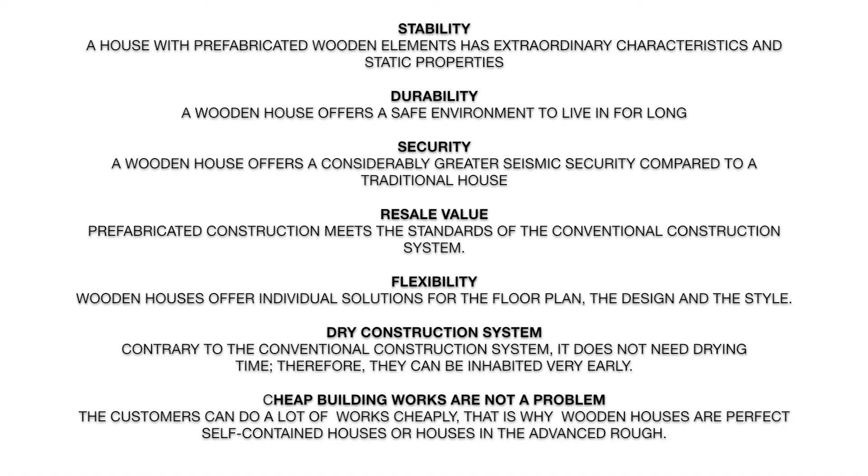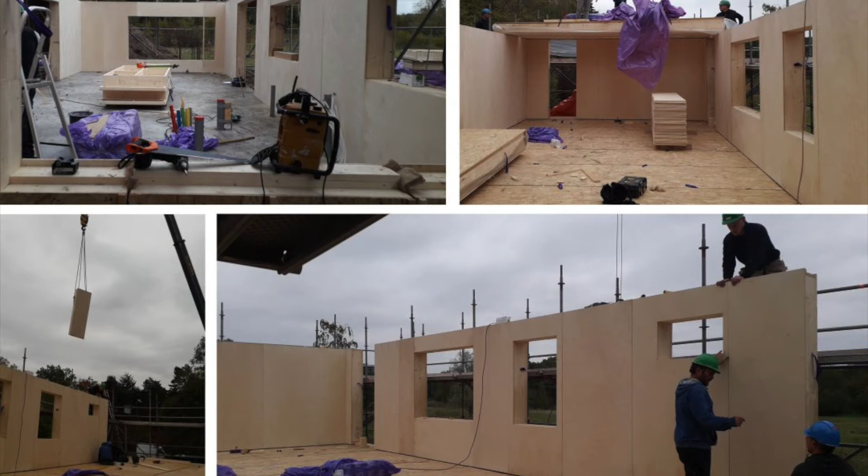In addition, we can say that prefabricated houses with a wooden frame construction system are built in record time, months ahead of a massive masonry house. A wooden house has excellent insulation values and a good reduction in CO2 emissions compared to the production of bricks, cement and steel. It has been verified that with the energy necessary for 1 square meter of brick wall, you can realize up to 8 square meters of wooden wall.

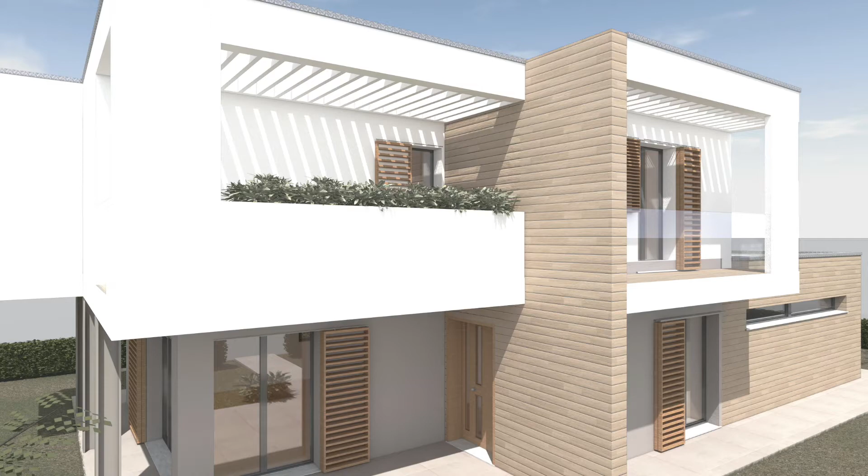The project was carried out by the architect Alessandro Vanoni, architectural designer expert in building with high energy efficiency. Vanoni's central idea about this work is to promote sustainable development construction with energy efficiency, high indoor comfort and respect for the environment as main objectives.

Vanoni's buildings are characterized by high energy performance that result in saving on heating and cooling costs, as well as a significant reduction in pollution emissions. The importance of the project stands in achieving an excellent architectural quality and high energy and technological performance. Vanoni's work is based on the concept of integrated design.

A building is comparable to the human body, where the structures correspond to the skeleton, the installations to the circulatory system, and the design to the skin. This metaphor explains how fundamental the connection between structural, plant, and architectural design is. They must work together and proceed together in order to give life to a harmonious organism.

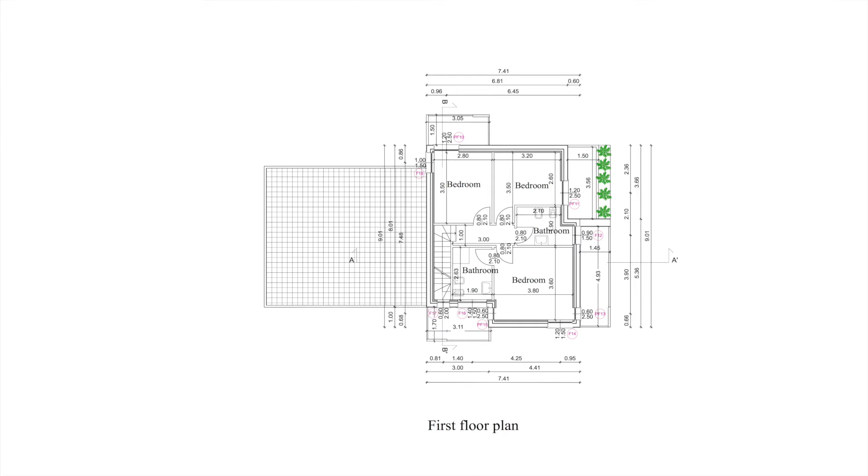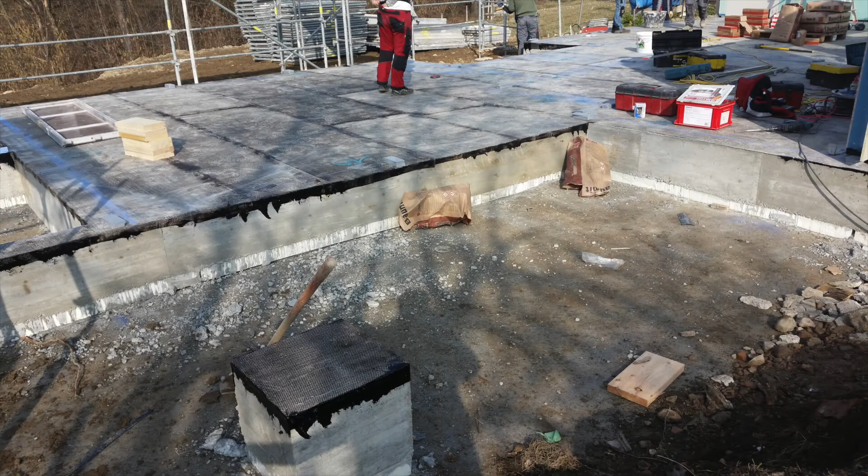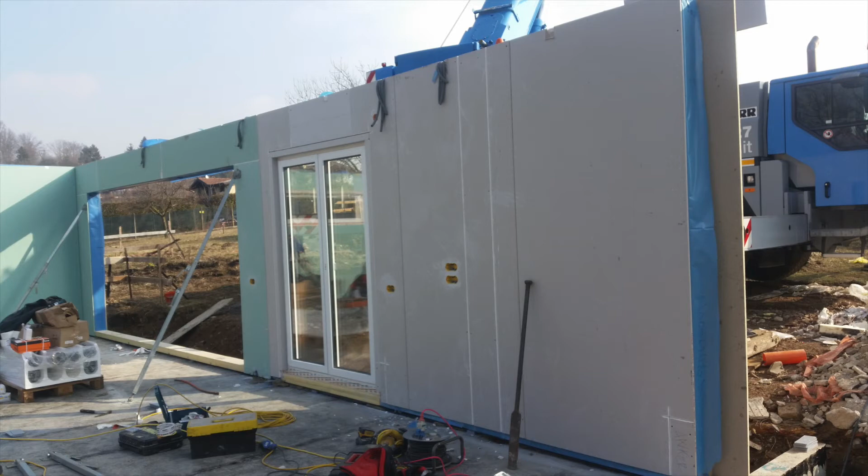Within walking distance from Varese, this residential project involves the construction of 4 single-family 2-story villas with low energy consumption. One of them is already finished. The high efficiency of walls is guaranteed by the use of eco-line panels. The efficiency level of the casing is maintained constant by the installation of PVC doors and windows with triple low emissive glass to ensure maximum performance and better durability over time.

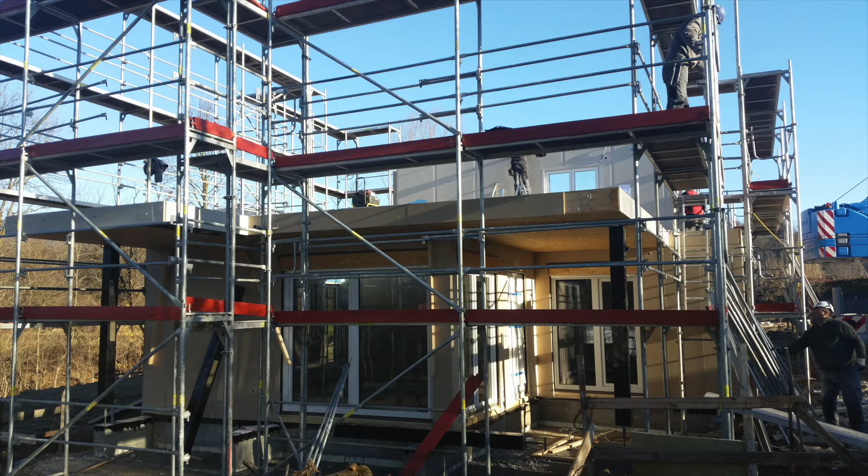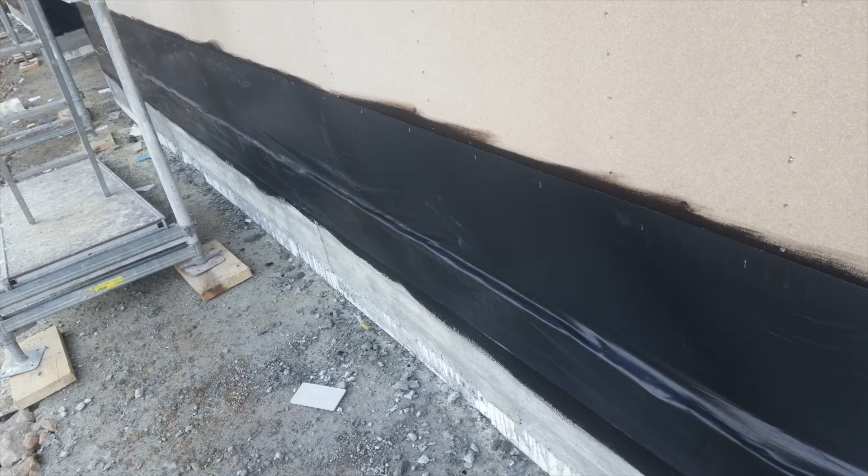The performance check on the completed building was done with a blower door test, which allows to measure the airtightness of a building after imposing a certain difference in pressure between inside and outside, identify the air leaks of the building envelope, and the presence of any discontinuities on the air seal layer. The results have highlighted the high performance achieved thanks to the prefabrication system in wood frame used.

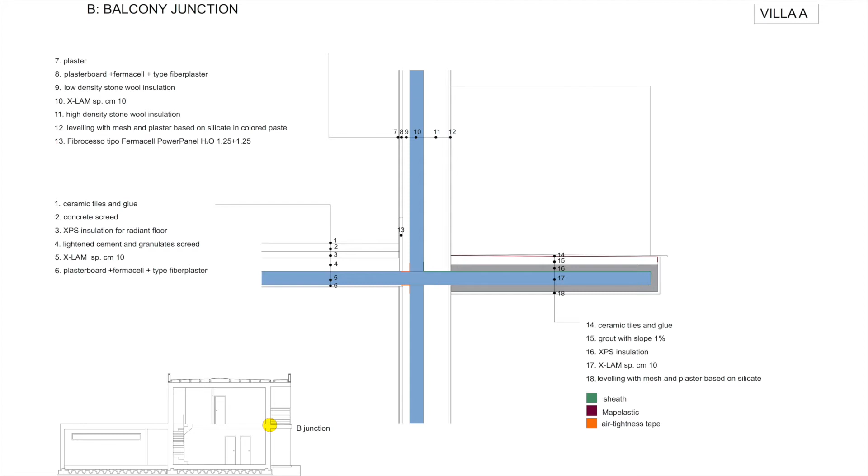In the construction of the building, Vanoni used for the insulation XPS panels, for the infill wall XLAM panels. Lightweight, easy to process, XPS is finding a very heterogeneous application in the building industry to insulate buildings. It is used in humid environments or in contact with the ground, in situations of high compressive stress, in the realization of insulating sandwich panels, the so-called overcoat insulation.

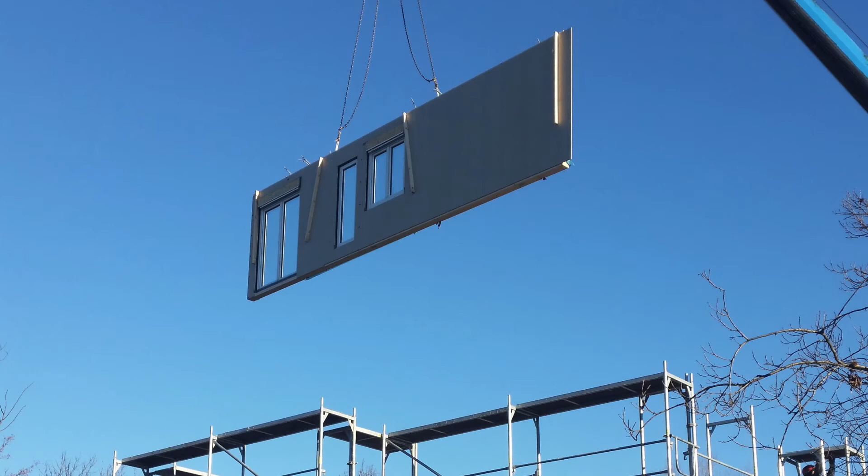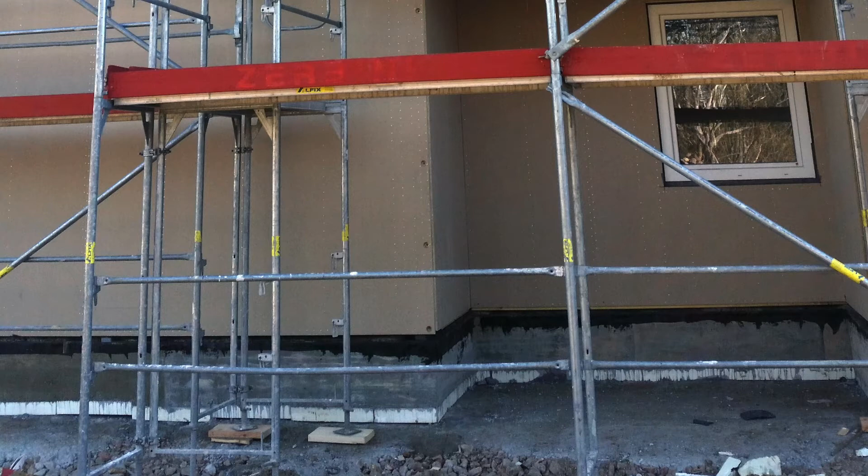It can also be used alone or in combination with plasterboard, wooden panels, or plastic or metal laminates to insulate floors, walls, or ceilings. XPS comes from styrene, a natural substance found naturally in beans and coffee beans, hops, walnuts, and strawberries. Extruded XPS is more compact. In fact, extruded means that its closed cell structure is homogeneous and stable, which makes it impossible to absorb water and allows it a high resistance to compression.

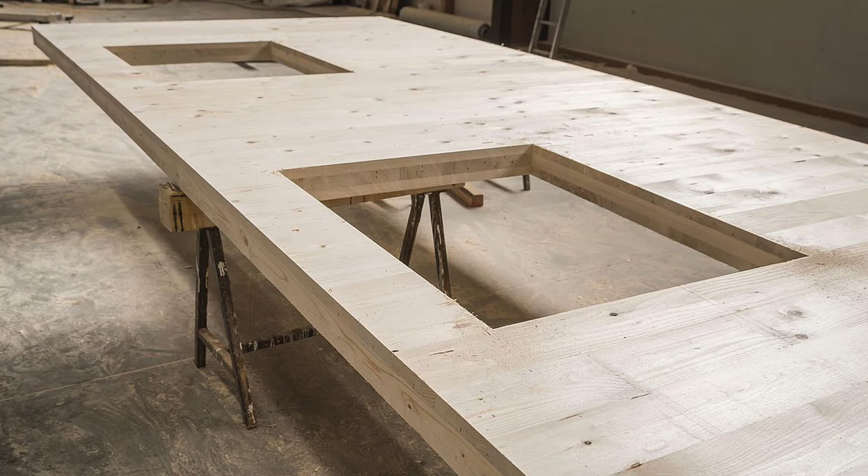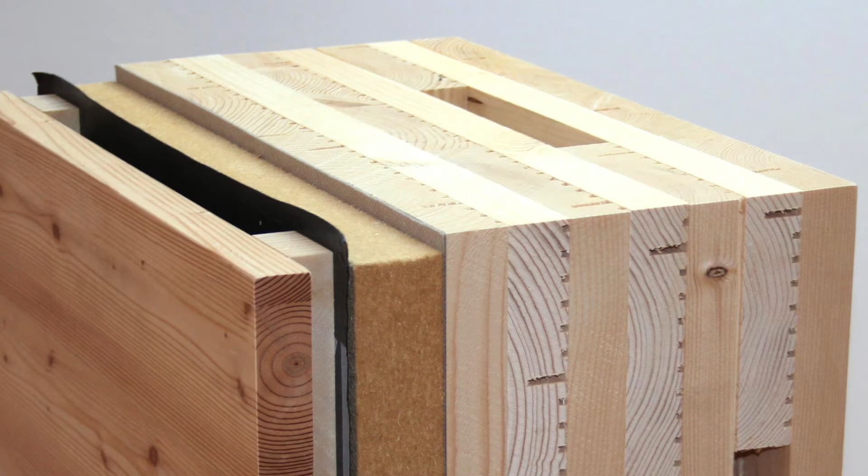There are different solutions and technologies to make wooden houses, including the XLAM system, which uses special wooden panels that are truly innovative products with excellent mechanical performance. The XLAM panels are obtained by gluing several layers of wood boards about 2 cm thick in odd numbers. These boards are glued in several directions so that the fibers of the different layers are orthogonal to each other. The aim is to improve the performance of the final panel.

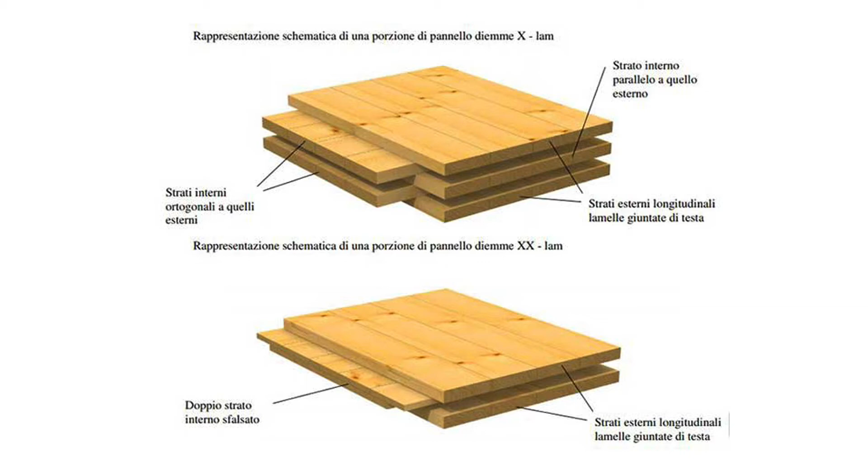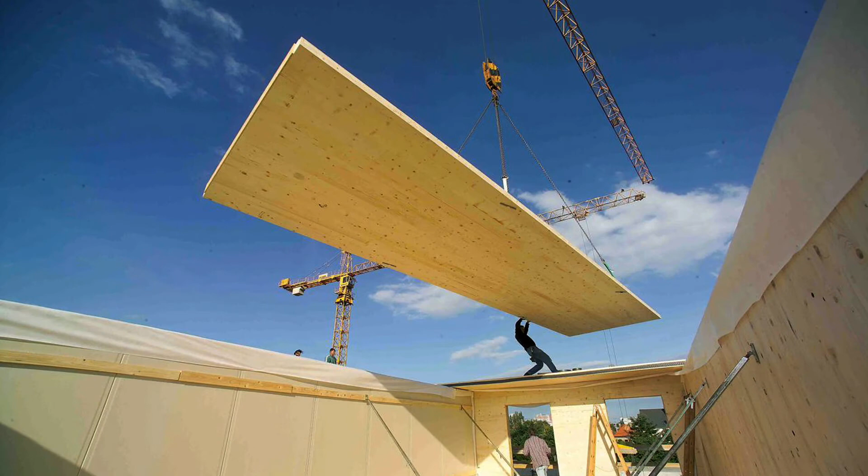Generally, the boards used are made of coniferous wood, subjected to a drying process that ensures protection from biological agents' attacks. In order to maintain the naturalness of the wood, the glues used for gluing the panels are free of formaldehyde and other dangerous chemical substances. The panels can be cut in different shapes and sizes, based on the architectural design of the building to be constructed.

Now, I would like to introduce you to the prefabricated granite house made by Stefano Pujatti of Elastico Farm. An impelling need for experimentation and an understanding detachment from the more conventional lines of research have accompanied Pujatti's production. The Houses of Cards project exemplifies his line of experimentation and today brings out with extreme clarity some of the themes that define it.

The search for alternative construction possibilities with traditional materials, as in the case with Sardinian granite, or their unexpected combination, confidence with an idea of architecture that is constantly at work between the physical reality of material and an uncompromising creative attitude. The Houses of Cards project reinterprets the performance standards of materials to produce a new and highly expressive constructive solution. The project for the Houses of Cards started at the end of 2015.

Elastico Farm has been carrying on for years a structural research on building materials and on the technology and techniques related to them. In the last 10 years, Elastico Farm have been engaged in the study and experimental application of prefabricated structural elements for industrial buildings. At the same time, they have worked with brick, stone, wood and prefabricated reinforced concrete industry to fully understand their potential and the possibility for alternative and combined use of those materials in the construction market.

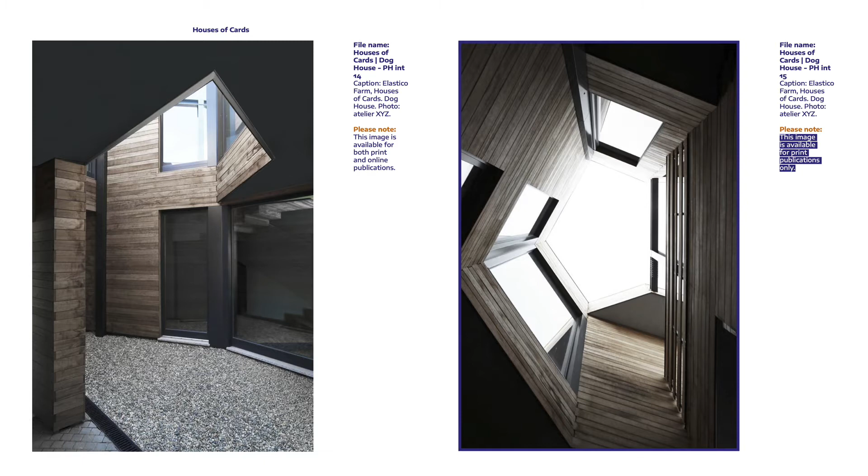Elastico research on Sardinian granite began in 2013 when they were approached by a quarry from Olbia to study their material and to evaluate the unexpressed potential of this unique, relatively inexpensive and abundant product.

Sardinian granite is an intrusive igneous rock that has excellent properties due to the pressure and temperature at the origin of its formation. While in the past it was widely used for structural purposes, as for the columns of the Pantheon, nowadays it is normally employed for cladding or flooring.

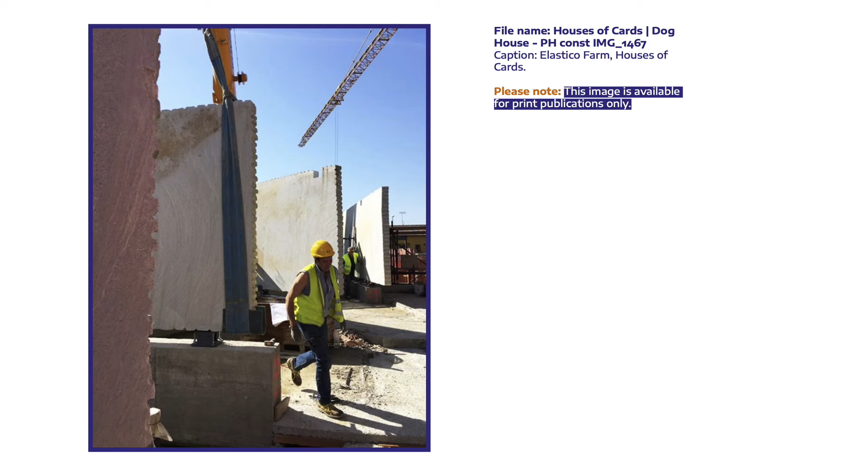The idea of using granite for load-bearing panels comes from observing the excavation process and the acquired knowledge of the technologies with which the rock is extracted and trimmed. Specifically, cutting the quarry wall with wires allows a certain accuracy, while the compactness of the material makes it possible to produce blocks and slabs, even of very large dimensions.

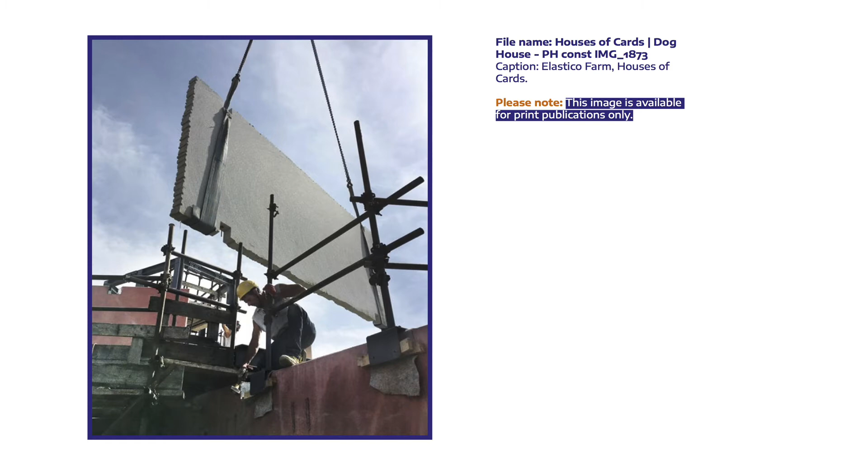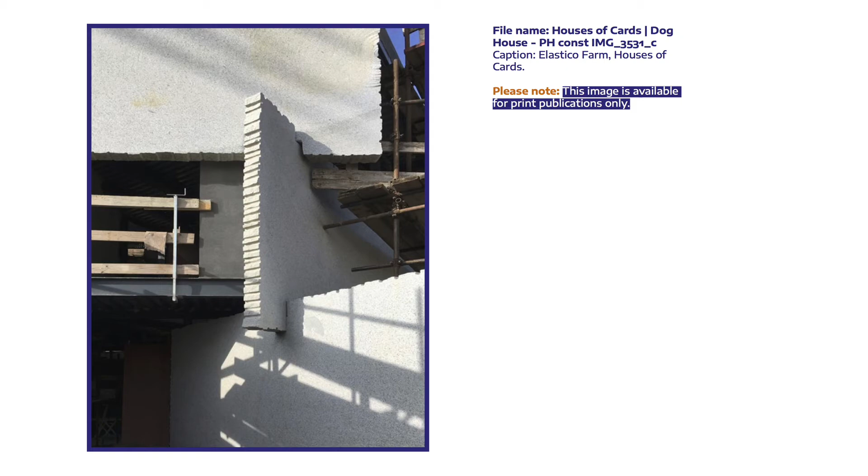Considering the weights and overall dimensions for transporting the slabs, Elastico established that the plausible size for optimal use of the panel was 600 cm by 240 cm, with a variable thickness depending on the structural needs from 12 cm to 20 cm.

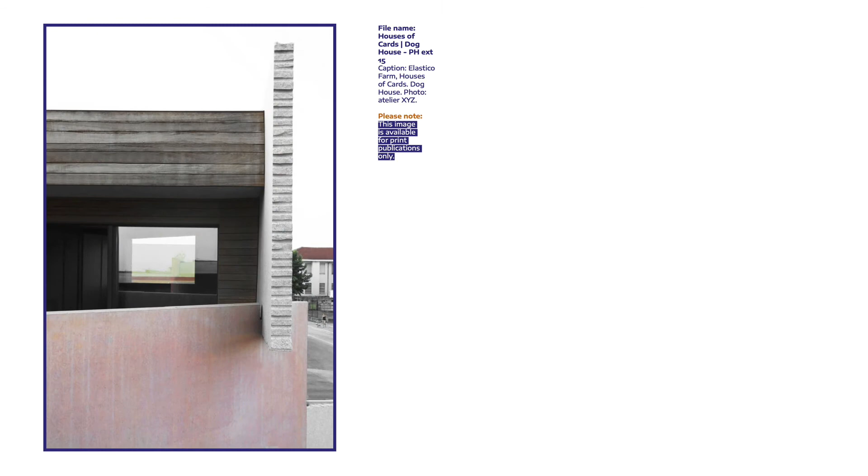The Houses of Cards, built in an allotment of a small town in the province of Turin in northern Italy, are part of the experimentation phase on the large granite slab for use as a load-bearing construction element. Both houses consist of a triple level of superimposed septa connected through a system of cuts and metal dowels. During the structural design phase, for normative reasons related to certification, Elastico Farm chose to combine granite slabs with other concrete panels.

Working in combination with the colored concrete panels helped Elastico Farm understand the limits and the opportunities of this material.

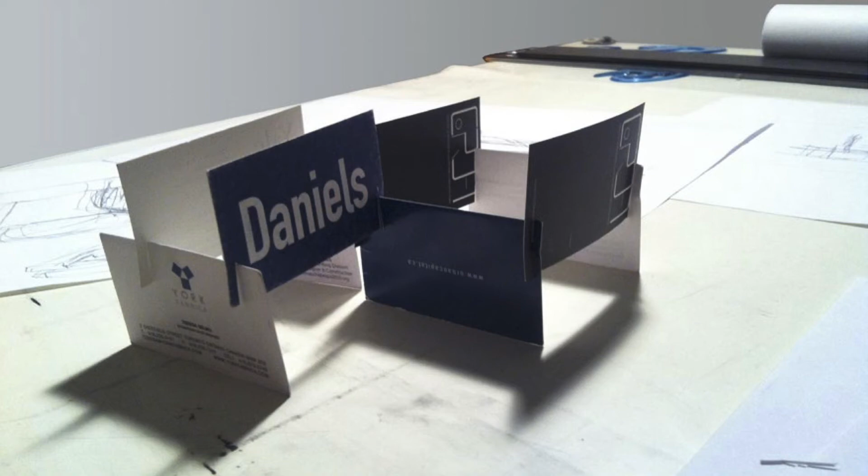The Cut House has an orthogonal and very compact structure in which the slabs define a sequence of external microenvironments that filter the passage towards the inside of the house. A double height hall connects the different levels. The heart of the house therefore acts as a scenographic distribution element and can be perceived from every room.

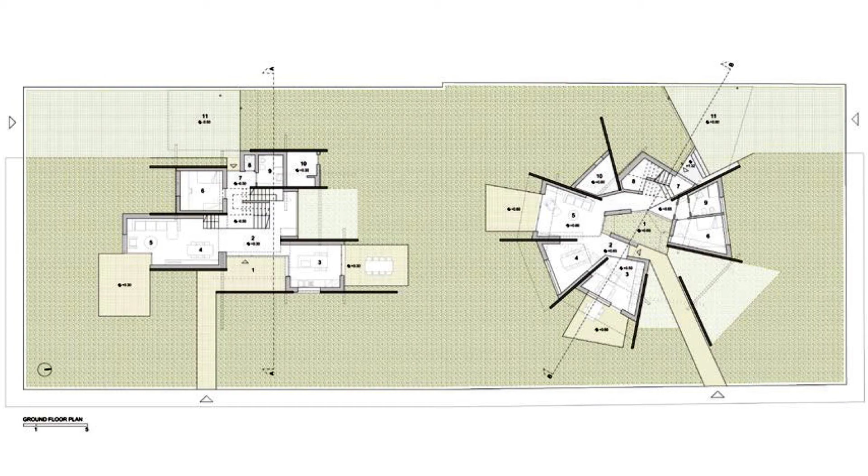The structure of the Doghouse develops around a central patio, an empty core that serves as an inner courtyard, whose access is mediated by a sequence of spaces defined by the radial arrangement of the slabs. Even internal rooms on the ground floor are arranged radially and always have direct contact with both the garden and the inner courtyard. On the first floor, however, the irregular layout of the structural panels produces less practicable internal and external spaces.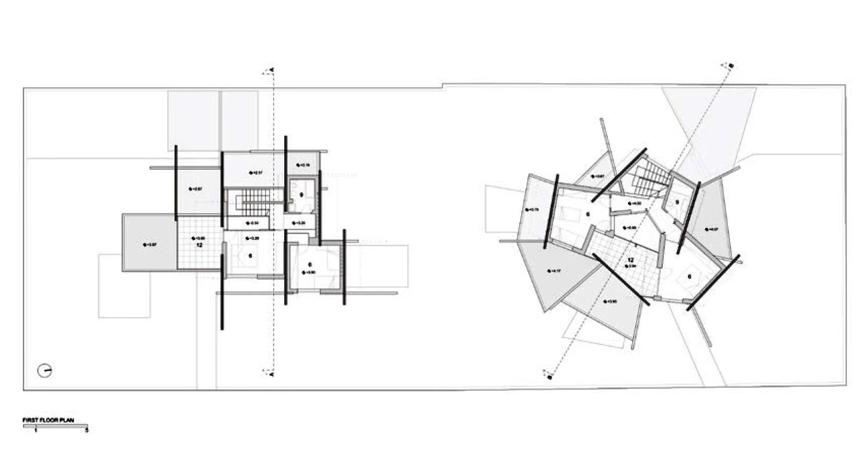Both bedrooms open onto a large terrace overlooking the empty interior of the house, an intimate space, close to the outside and the nearby street.

In both buildings, the load-bearing structure plays a scenographic role and defines the essence of the two houses. The slabs, with the materiality of granite or the white color of the concrete, define and give character to the spaces.

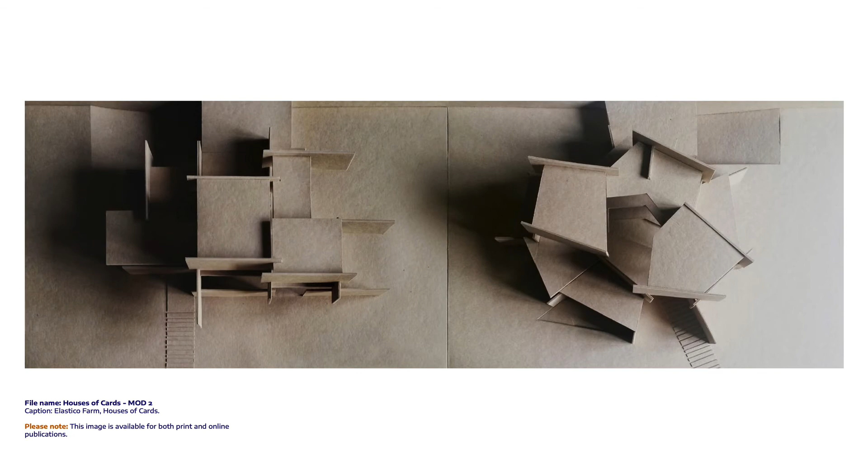Similarly to the vertical structures, the floors were installed using the technology of the composite slab in concrete and steel. These elements rest directly on the panels thanks to saddle or plate connections and connect the structural slabs together.

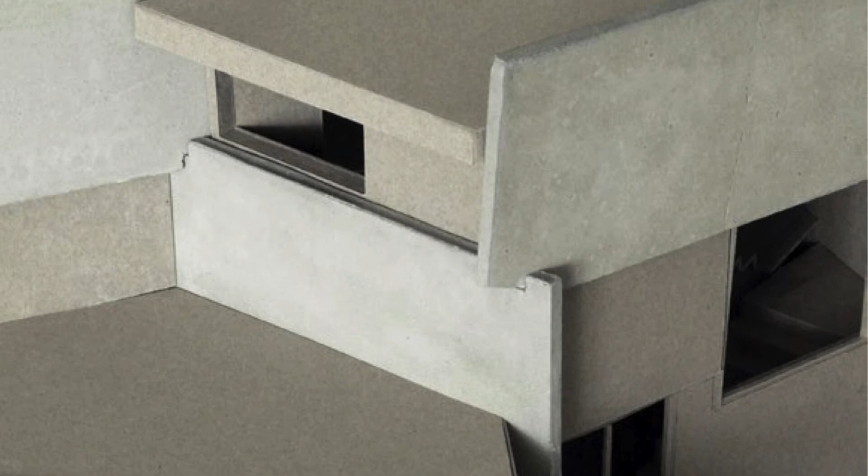During the design phase, the architects paid great attention to choosing the most efficient technologies to insulate and waterproof the structural skeleton and the entire building. The different points of contact between the structural elements, and between them and the building envelope, required solutions that were always very specific.

This allowed the designers to solve every thermal bridge and avoid possible infiltrations while always keeping things clear. During the design and construction phase, Elastico Farm managed to develop a strategy capable of avoiding thermal bridges even when the slabs are exposed on the interior.

In both houses, cast-in-place concrete was used only for the foundations and the composite slabs. All the finishes, both inside and outside, are consistent with the initial concept. Mechanical and electrical systems rely on solutions that allow great flexibility for possible future changes and expansions.

Finally, after these examples, I would like to conclude my report by quoting the work of ofLab. ofLab creates a very alternative prefabricated wall that is almost a provocation and an invitation to reflect.

The entrance door that marks the outdoor spaces of the Expo Casa 2019 event is conceived in the form of a communicative wall, programmatically titled Message in the Bottles.

The image of the door, both immediate and evocative, is defined through a system of walls made with a multi-directional steel tubular structure. The wall is inscribed with messages inviting reflection on the need for a new ethical responsibility in building, made by direct printing on PVC sheeting secured by elastic bands to the metal structure.